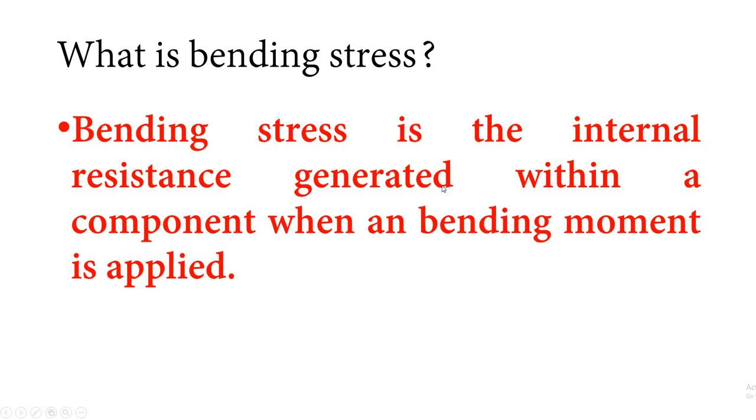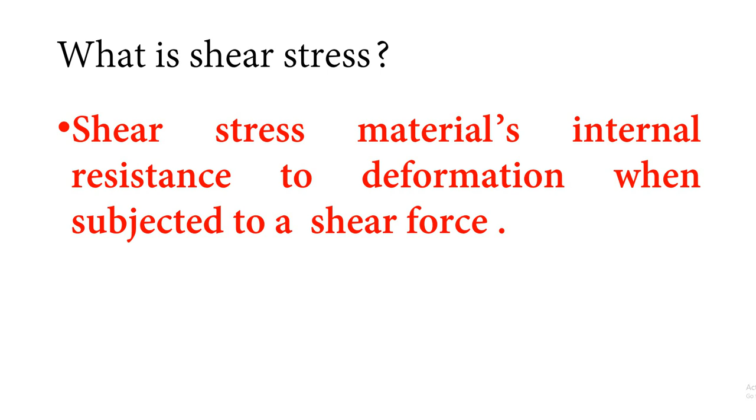So the bending stress is the internal resistance that is generated within the component when bending moment is applied. Same way, shear stress is what? Shear stress is also the material's internal resistance to the deformation when it is subjected to the shear force. Now, let us draw bending stress and shear stress diagram.

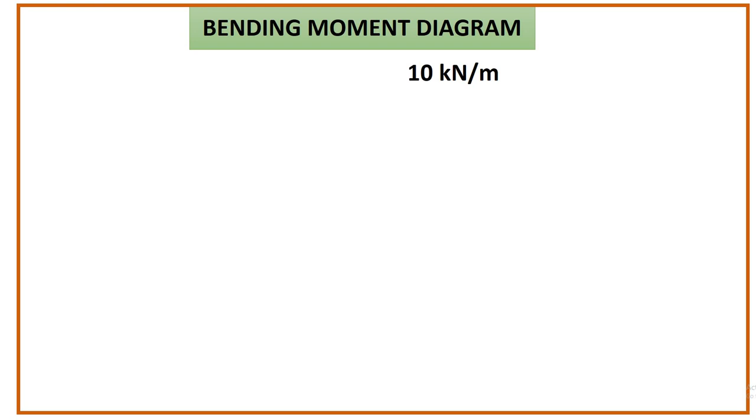For the same, first of all, we should know about maximum bending moment and maximum shear force of any particular beam. This one is, say, simply supported beam with a load of 10 kilonewton per meter. Let us draw bending moment diagram first. At ends we have 0 bending moment and at center it is 20 into 2 clockwise from this reaction minus, due to this UDL, 10 into 2 into 1. So the bending moment at center is 20 kilonewton meter. So the maximum bending moment is 20 kilonewton meter.

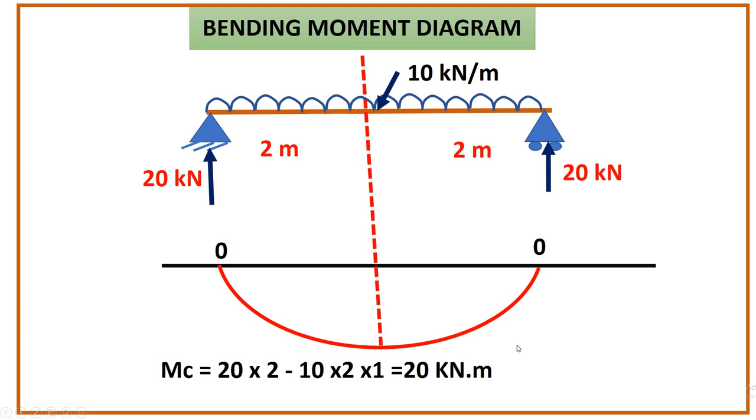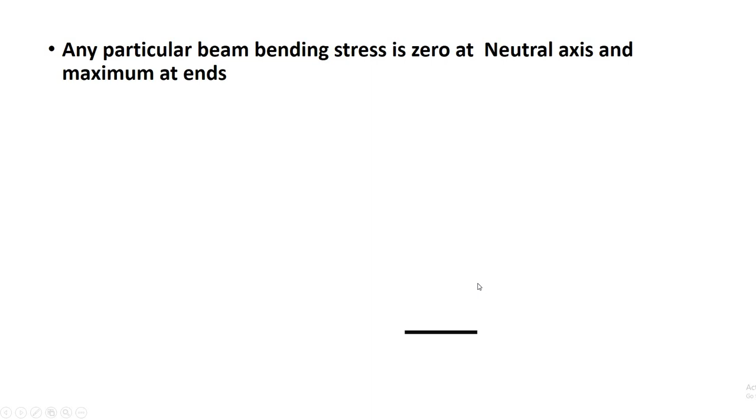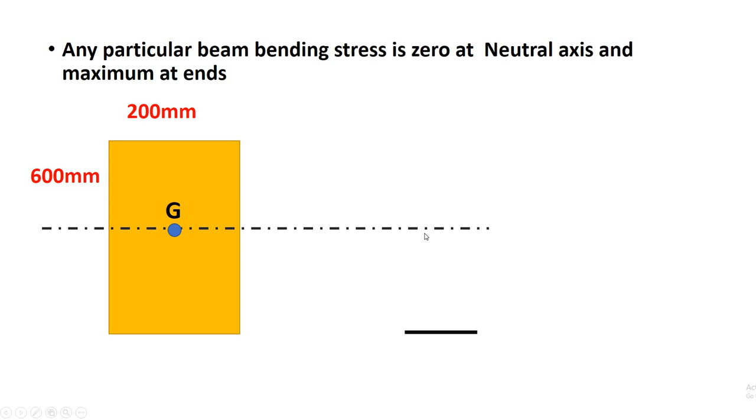Let us now draw the bending stress diagram. For any particular beam the bending stress is 0 at neutral axis and it is maximum at ends. This is our cross section of 200 by 600 mm. This is the line of neutral axis, and here is the centroid of this rectangular section. This is the distance of the extreme fiber from the centroid of this particular beam.

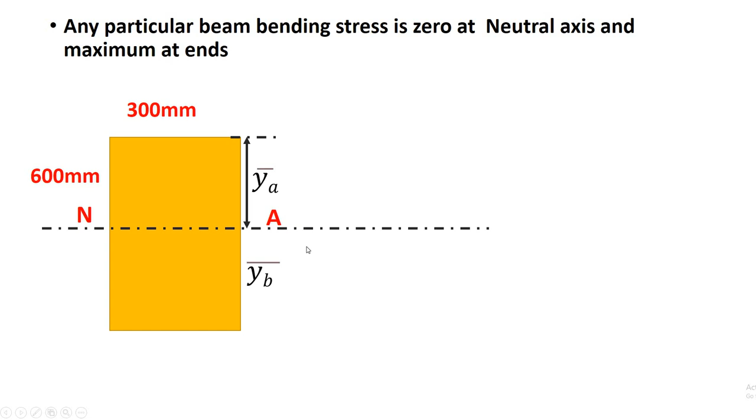Now next, let us draw the diagram. This is our cross section. This is the equation from theory of pure bending: F upon y is equal to M upon I. Maximum bending moment we have already derived, it is 20 kilonewton meter. And y bar, the distance from neutral axis, is 600 by 2, equal to 300 mm. I is equal to BD cube by 12, that is 5.4 into 10 raised to 9. From this equation, F is equal to M into y divided by I.

Here in this case, yA and yB both are same because our section is a rectangular section. So the distance from the neutral axis to the top fiber and bottom fiber are same, and we have the same value of bending stress at top fiber and bottom fiber: 1.11 at top and 1.11 at bottom. When the load is applied downwards, the top fiber is in compression and the bottom fiber is in tension. So C for compression and T for tension.

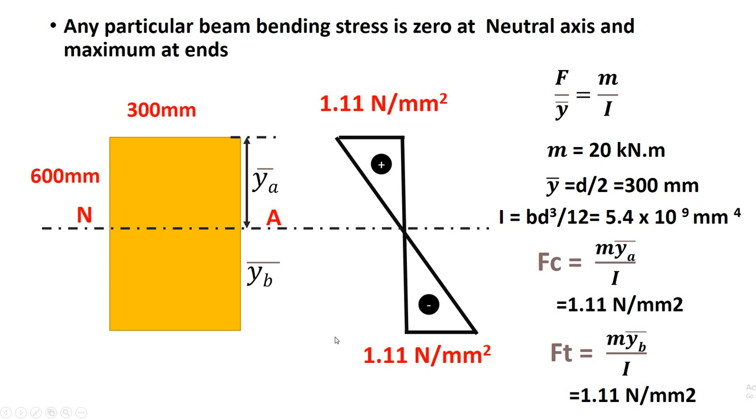Here the compression is positive and the tension is negative. At neutral axis bending stress is 0. Over here it is 1.11 maximum and over here it is also 1.11 maximum, but here we have compression and here we have tension. At top fiber we have compression, at bottom fiber we have tension. So these are the values of bending stress and this is the bending stress diagram.

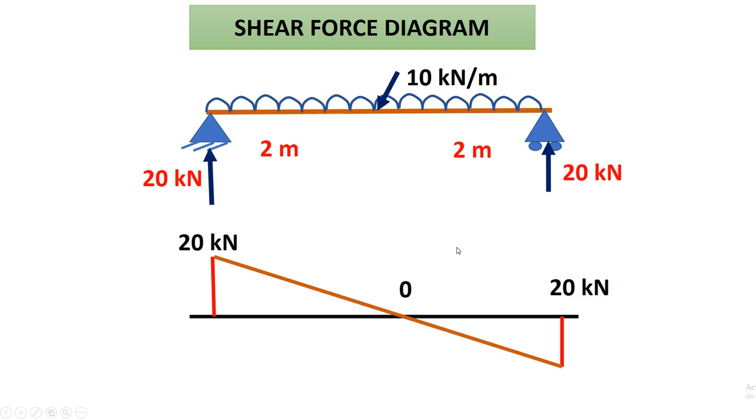Now let us draw shear stress diagram. For the same we have to plot the shear force diagram. For this particular beam, the shear force diagram is 20 kilonewton up, 0 at center, and 20 kilonewton down. So the maximum shear force value is 20 kilonewton. Now let us draw the shear stress diagram. Remember the shear stress is 0 at ends and maximum at mid span, exactly opposite to the bending stress. At ends we have 0 and at neutral axis we have maximum value of shear stress.

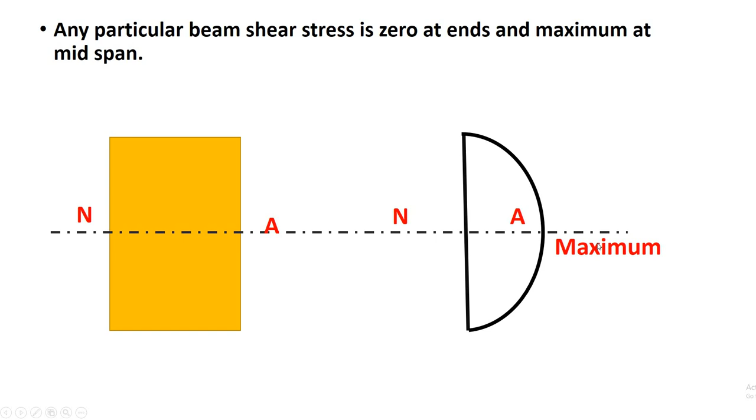This is our cross section, this is the neutral axis. The equation for shear stress is S A y bar upon I B. S is the maximum shear force, 20 kilonewton, so 20 into 10 raised to 3 Newton. A y bar, what is that? This is our centroid, and our section is 300 by 600. Either you consider the top portion or the bottom portion, both are the same.

So 300 into 300, exactly half of this, multiplied by the distance from neutral axis. The distance from neutral axis is also 300. So our A y bar, with distance from centroid to either top fiber or bottom fiber, because both are same, is 27 into 10 raised to 6. And I is equal, same way, to BD cube by 12. So this is the value of moment of inertia.

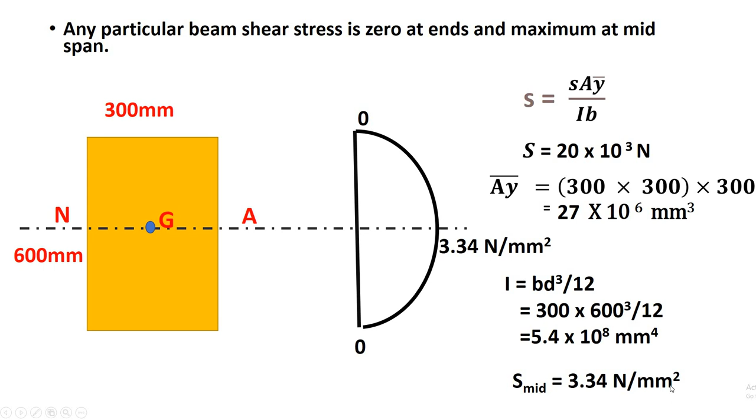From that we determine the shear stress at the center, 3.34 Newton per mm square. Putting all these values, shear force, A y bar, I, the moment of inertia, and B, the width of cross section, 300 mm, we get shear stress equal to 3.34 Newton per mm square. Hope, my dear students, it is clear how to plot the shear force, shear stress and bending stress diagrams.